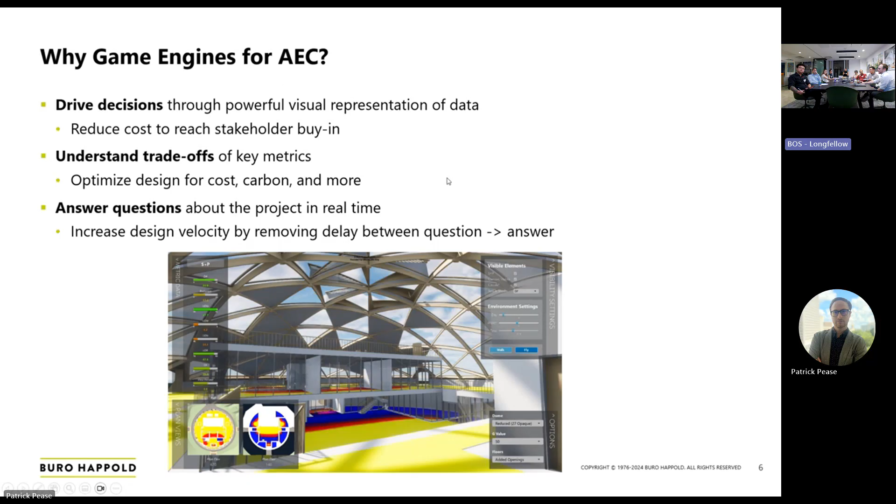The way we think about it is really in three key steps. The first is to ideate, and here it's about collecting the questions that we're trying to answer. We're not trying to go straight into analysis - we're really trying to step back and say, okay, what are we trying to solve? So trying to define: are we talking about the HVAC system? Is that the question? What's the basic HVAC system for this building?

Are we doing a massing study? Is the massing what we're looking at? And then energy costs, is that important? Are we worried about the envelope and its impact for its costs or operational costs? So it's really making sure we understand the questions. And that enables us essentially to define or advise on these are the considerations we want to look at to answer your question for you.

So option A, massing, ABC, envelope XYZ, and intermix those things. But really making sure you start first with sitting with the client and saying, okay, what are the questions? So we can make sure we answer those correctly instead of going straight into some analysis.

The next step, after that ideation, defining the problem, is going through, okay, how are you going to make your decision? We've defined what questions you have. What's the best HVAC system? Now the question is, what is best to you?

Is it first cost that's really important to you? Is it operational cost? Is it embodied carbon? Or is it something else altogether? Something much harder for us to simulate, but equally important to certainly some of our clients.

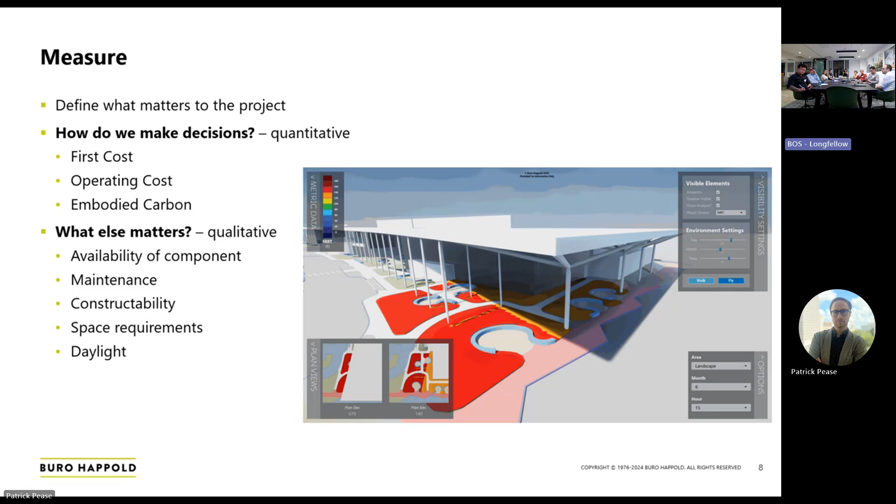And then once you pull those together, this idea of exploring - once you have all of that, what your questions are, how you're measuring success against those questions - then essentially creating this space to explore the opportunities, to see how things line up, and presenting that with the client and walking them through what could happen there.

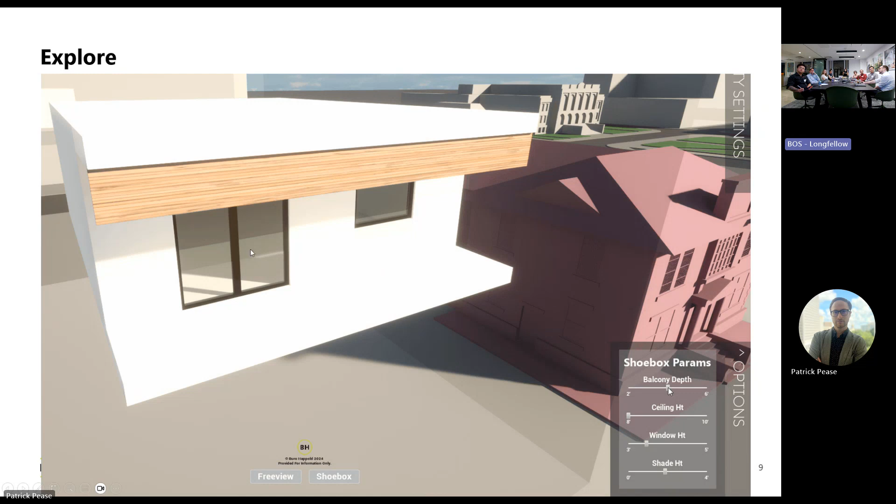So this is, I think, a first example of one of the more shoeboxy kind of game engines that we've produced, where we're looking at the size of the shade and how that looks as far as light penetration into the space beyond.

So getting into a bit more detail with the game engine, I pulled some more of the process slides out so I could talk to them, like how it's all coming together. So the game engine is essentially an interactive 3D app. We are using the technology Unreal Engine.

There are others out there. I know Unity also has some capability for this. So I think there are some people using that as an engine. We just use Unreal Engine.

And really what we're doing is the engine gives us some things for free almost. It has this 3D modeling space. It already has controls in it to move around and have a camera - that's what this engine has. It has things like real-time rendering - again, that's what the engine has.

It's great, but what we're feeding into is essentially these physics-based simulations or things like CFD, and pulling that data in so that we layer it on top of what was already there, which is essentially a more static environment. So we're pulling that data in.

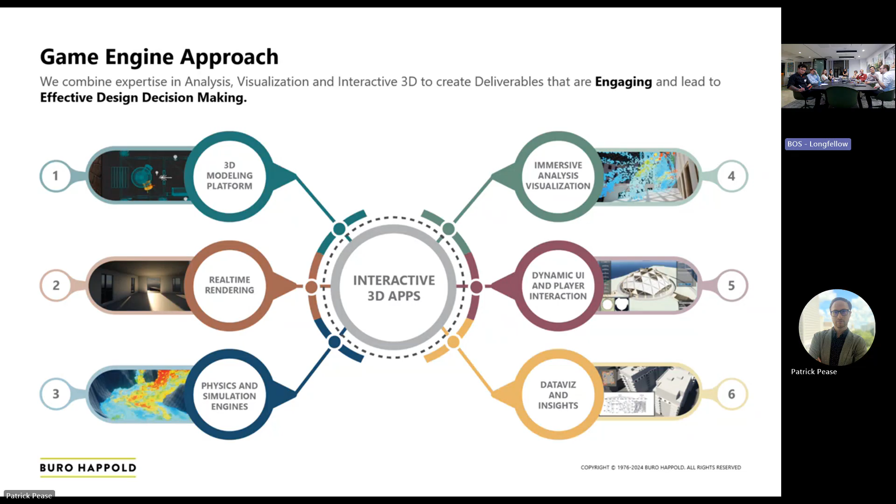And we can also do add-ons such as a UI that gives us control over what we're viewing, or additional things like a table we can pull in, things like that. So there are kind of add-ons that we can have.

The workflow to get out of these is not dissimilar to parametric modeling. In this case, this is a workflow that I worked on with a client about a year ago. And essentially it was kind of sitting down with them. They were working in Rhino, so we're going to do the analysis through Rhino.

So in this case, all the analysis is happening through a series of Ladybug and Honeybee enabled analysis through Radiance and EnergyPlus - not really new things. But what we're layering on top of that is something that allows us to build a mesh, and that mesh is what we're importing into the 3D visualization.

And I have another slide of what that mesh is, but it essentially takes the visualization you would get within the Rhino viewer, making that a mesh component, and then we load it into the Unreal Engine. So that's really just the extra step on top.

But really what we have here is when we were talking with the client, they were going to pass us back and forth several Rhino models. So we wanted to have this idea of what's a feedback loop - we agreed you were going to provide these layers that were going to fit with our scripts.

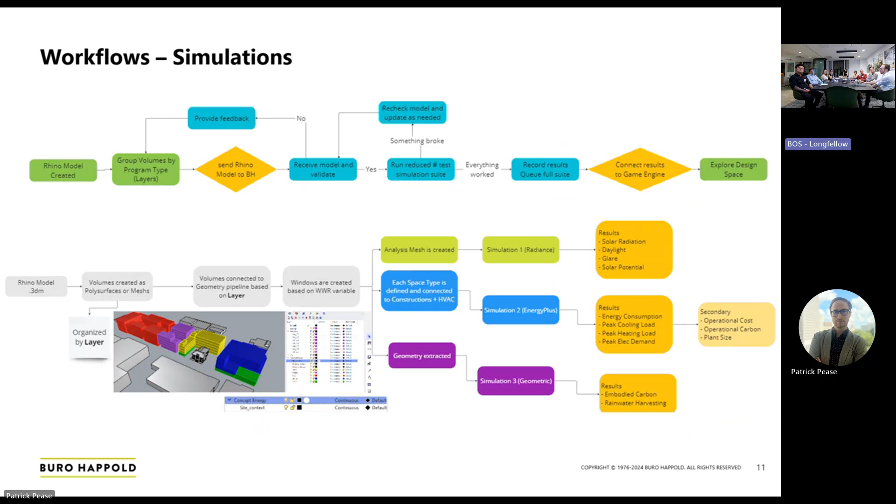First check: did it have the layers? No. Remind them they're supposed to have layers, feedback through - so we can work very iteratively together instead of constantly fixing these models every time. So that was an important aspect of utilizing that at scale and at speed.

How we're doing a lot of the meshes, as I talked about, and bringing them into the engine is using what is called the BHoM. So the BHoM stands for Buildings and Habitats object Model.

It is open source. It is generally created by the computation team here at Buro Happold. I think they released it actually at SimBuild World in Rome, if I remember, is when they released it.

But it has essentially this toolkit to connect data from point A to point B. So there's a lot of these schemas out there. You wouldn't have to use this one. It's the one we're using, but it's essentially a schema to say, okay, I have mesh in one simulation software, Ladybug, IES, OpenStudio. I need to convert it into these components that our tool then transfers into the Unreal actors.

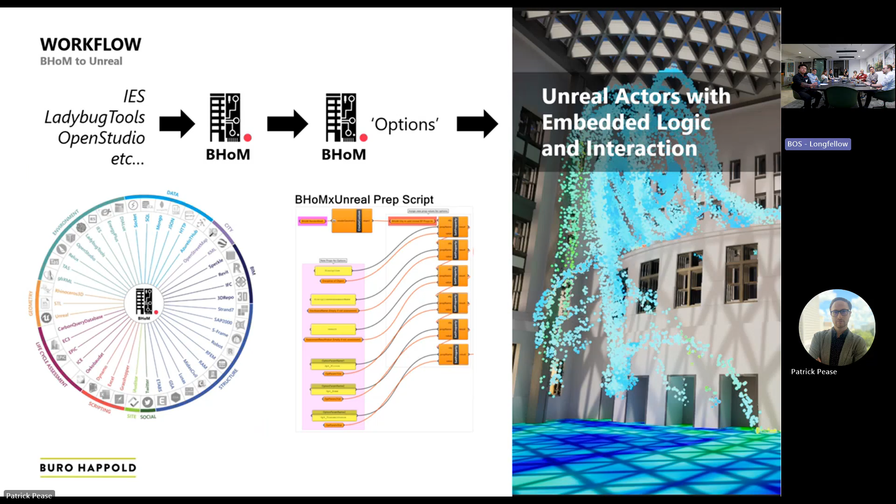And so this, I think, could definitely be done in multiple ways. And you can kind of see the amount of connectors that we've set up that allows us to do it, mostly with EnergyPlus, Radiance, and then ANSYS CFD are the main ones that we're using for day-to-day.

I guess a bit more about the script is, in addition to the visuals, we always try to make sure we add a score in as well, because we want a way to essentially quantify, okay, the visual is beautiful, but when someone asks, okay, is that good? How do we say it's good or not?

So we create that scale that's back in kind of that measure: first cost, what's good, first cost, what's bad, you define those. And so there's always kind of this metric layer as well, so that you could always take that more kind of step back approach and say, okay, it looks beautiful, looks like all the color is red, if that's good daylight in this case, but is that actually the best performing? Or is something else like really hurting here? And so we have various essentially schema to say, okay, define what those are.

And in the various scripts that we've created, kind of pull that information through and then maps to essentially a template that we create within the Unreal Engine database, so we can kind of push it relatively quickly. But this idea of scoring, I think, is important because that provides, it takes that step back and provides that rigor of the analysis that we are doing. It's not just about the visual. It is about, okay, quantitatively, is this performing the way it should be? What's the number that we put to it? So that's an important aspect.

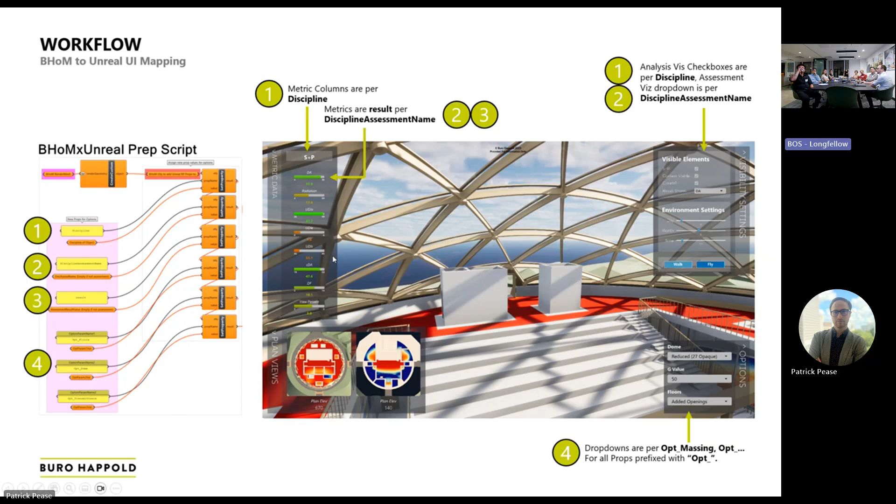I now have a couple case studies that I'll run through, and I'll go through just a couple, and I'll pull up a couple of visuals. But this is one of the first ones that the team did. It's actually for this kind of atrium space. This one's in the UK.

And what they looked at is essentially optimizing the shading within this kind of skylight dome that worked with essentially the daylight, the glare, and also the solar heat gain, but then gave them a lot of kind of space to view. The visual was supposed to be to see as much of the sky as possible.

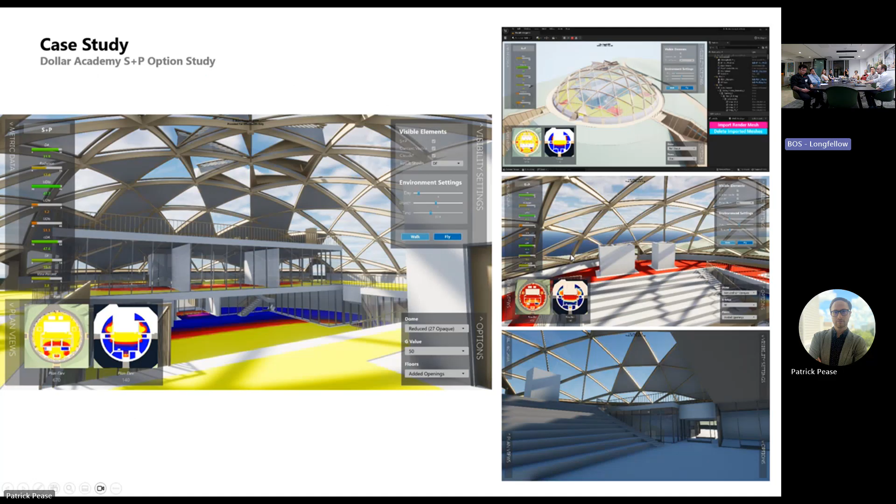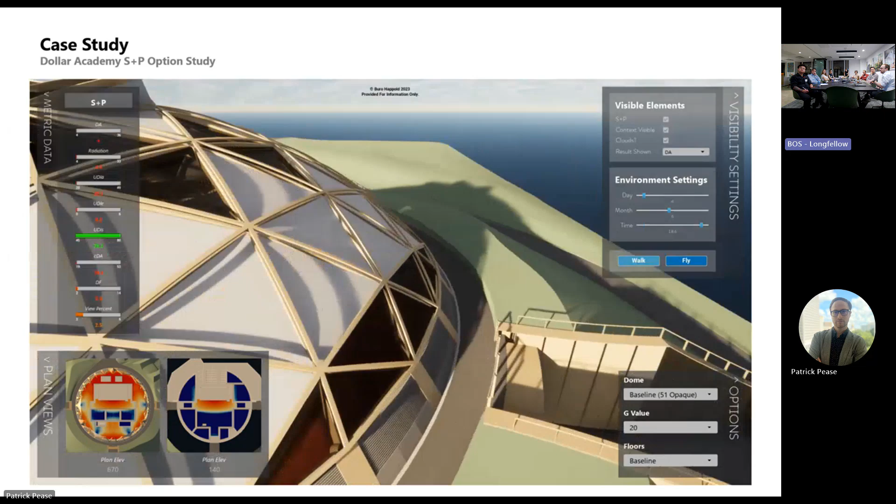So we kind of built this looking at glare with different types of glass, different components of shading elements or not. And I think this is a video. It let them not only see based on a time scale what's it actually look like, but also understand kind of within the space, okay, what does this mean if we're standing in this corner?

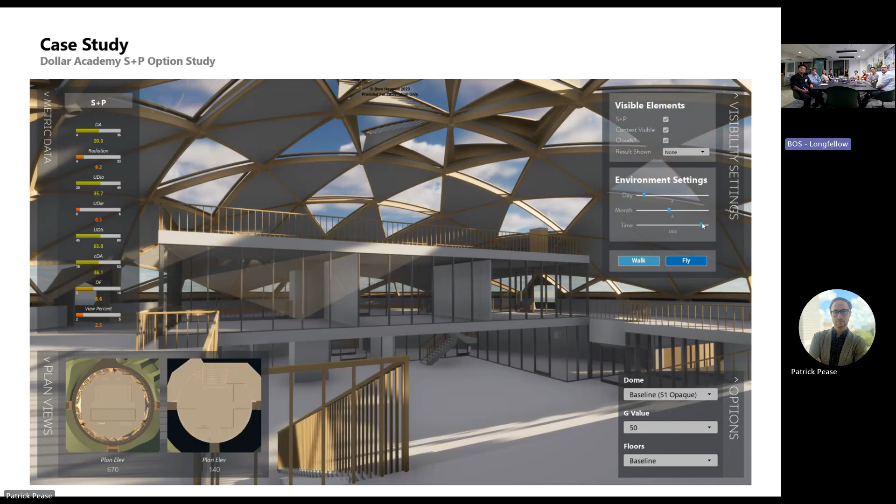You can see on the left here, some of these scores are really low. I think this is probably one of the bad examples, and then there's some better options that were looked at. It allowed them to see not only the impact of these options, so this G value, again, UK, so that'd be solar heat gain coefficient for us, but allowed us to see a lot of this, which is really fantastic.

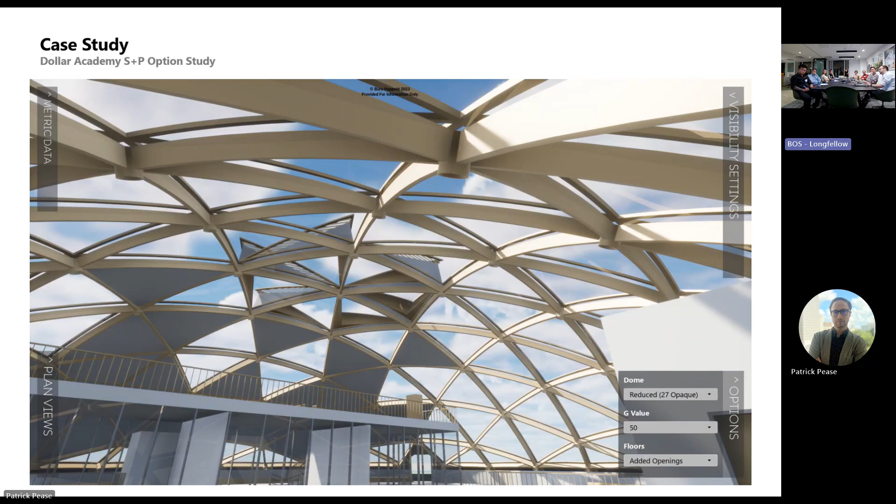The really nice thing too about Unreal Engine, that environmental settings, that's essentially the sun location, that you can change any day, any time of the year, which is fantastic. And so you can layer that on top of the analysis, which is really nice just to see the sun.

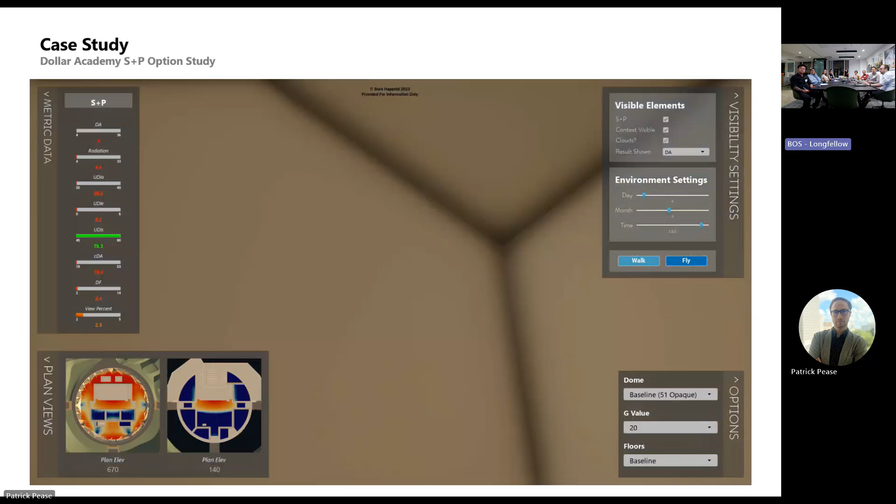So that's one use case, kind of looking at, okay, how do you build these shades to get the pattern of light you want, and then also the performance of glare, etc.

Another one that's really interesting, we saw a screenshot of this before. This one's also UK based, and here we were looking at overheating potential. Most apartment buildings in the UK don't have air conditioning, which 50 odd years ago was absolutely fine since it didn't get that hot. But the world is sadly warming up, and one of the code requirements is to look at passive overheating - will this place overheat? If it does, that's too much sunlight going on.

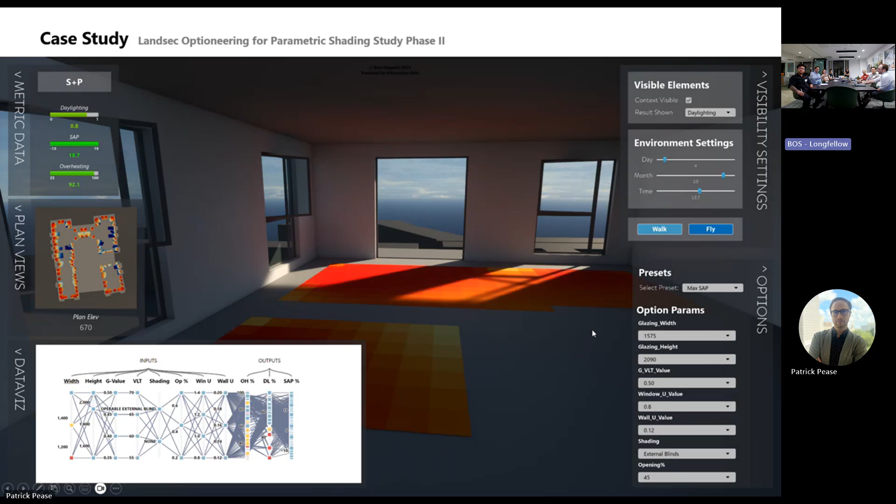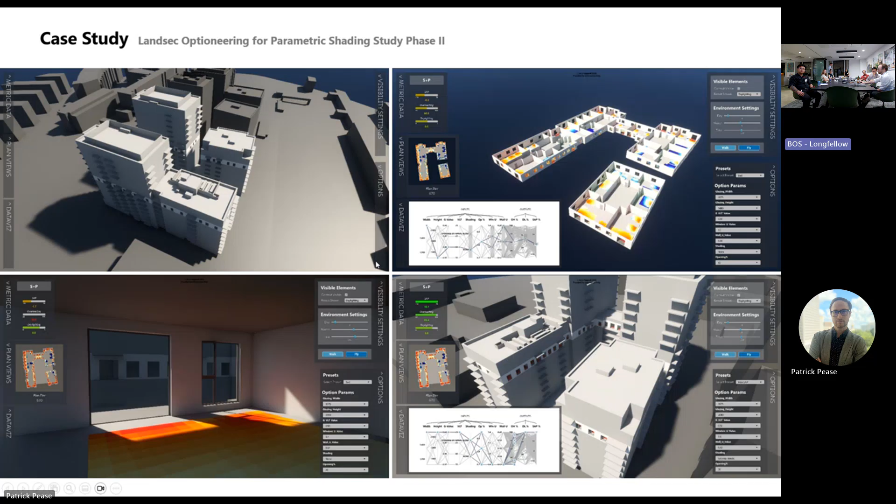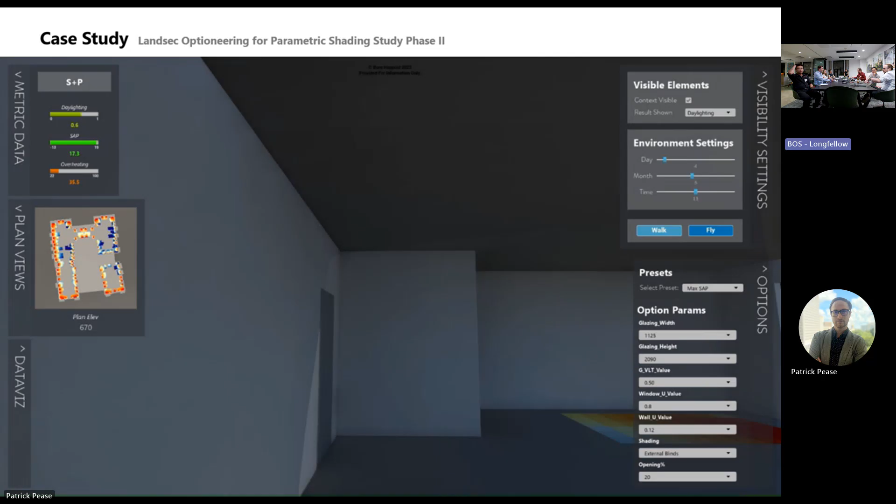In this study, they looked not even at the full floor plate - it's a localized study just where the windows are. Looking through a series of parametric options, they analyzed based on balconies, window size, all of this, to prove out a design. They were looking for a series of multiple designs that would result in buildings that had daylight, but also don't overheat, which is the critical requirement. This was very helpful since they were going to build 100-odd of these apartments, so selecting the window design was very important because if you build 100 of something, you want to make sure you like it. This became very powerful for that.

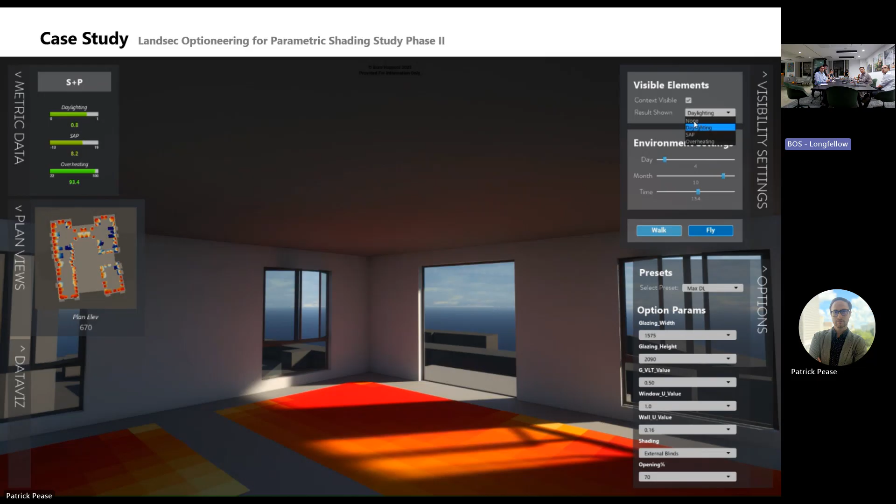That's another interesting example. So this is overheating potential, and you can see somewhere in red, that means there's a lot of overheating happening. Somewhere in green, so they're pretty shaded. That was the analysis for that one.

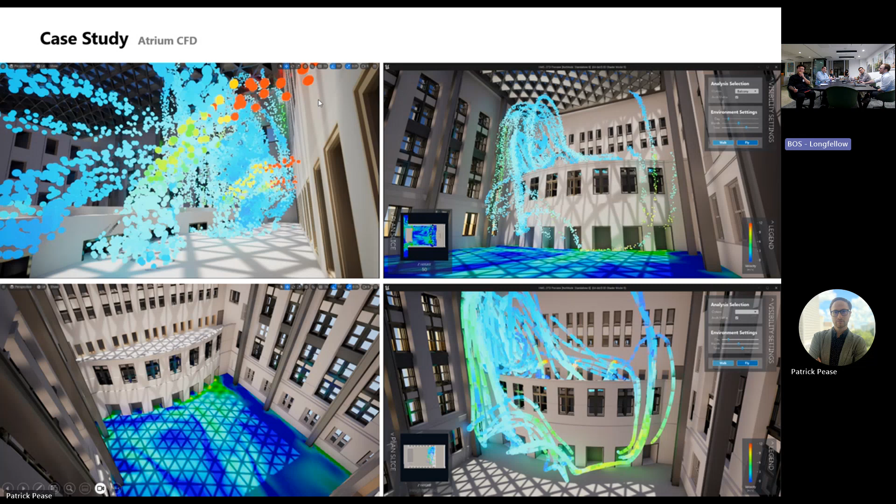This is now a slightly different study - not energy or daylight, but actually a CFD study. This is for an atrium space at a medical school here in Boston. They were enclosing what used to be an outdoor courtyard, putting a big glass roof on it. But then the question is, is it going to overheat? So we did quite a bit of CFD analysis looking at locations of diffusers.

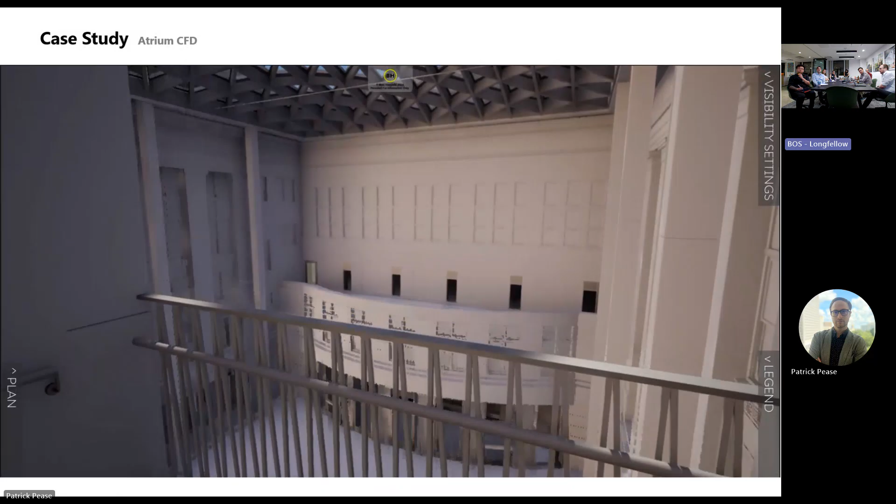What we're trying to visualize is not only the airflow pattern from the CFD, which gives us these really cool dot patterns, but also something we've been adding on from the experimental part - these are streamlines of the actual airflow. Then here on the map, this is the actual temperature and operative temperature for those grid points from the CFD analysis.

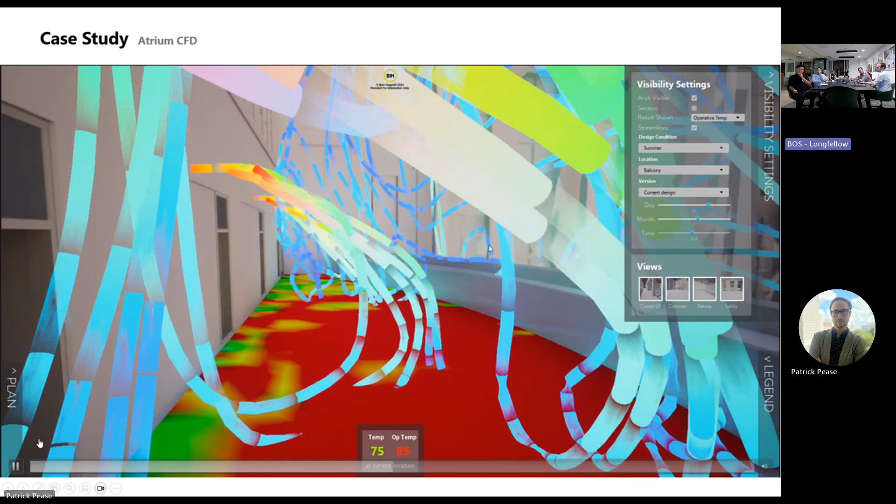ANSYS in this case, yes. What we did is we actually enabled via the walk function - you could walk around and report out what's the actual field for that grid. So really trying to take it out of traditionally just a printed PDF to really give them an experience of, oh, if you do this, this is what it's going to feel like in this location. Walk to this corner, it will feel like this. So it makes it much more visual for the clients, and they can really experience it in some way.

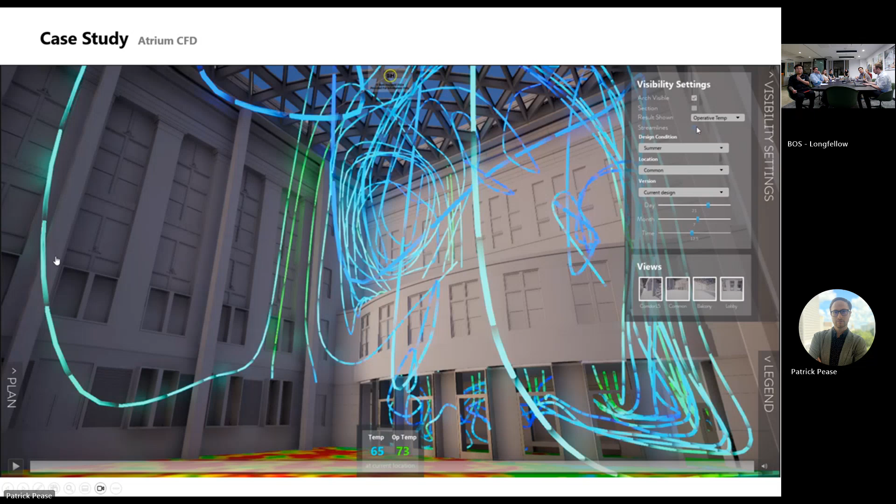Do you guys use this for data centers? We don't do many data centers, actually, so no, I don't think we have. But I think you could, yeah.

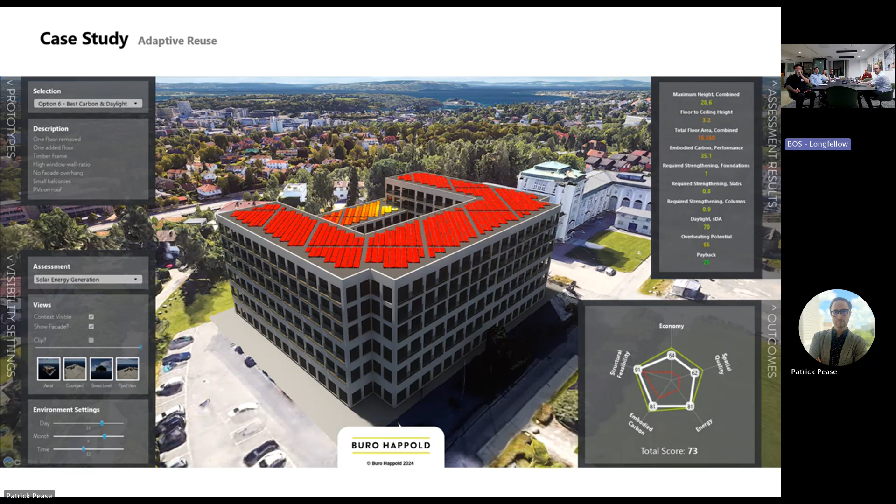And then, the last one I want to show that we've been doing—I've actually been doing a lot of these projects, but unfortunately the projects I've been working on are confidential, so I can't show you.

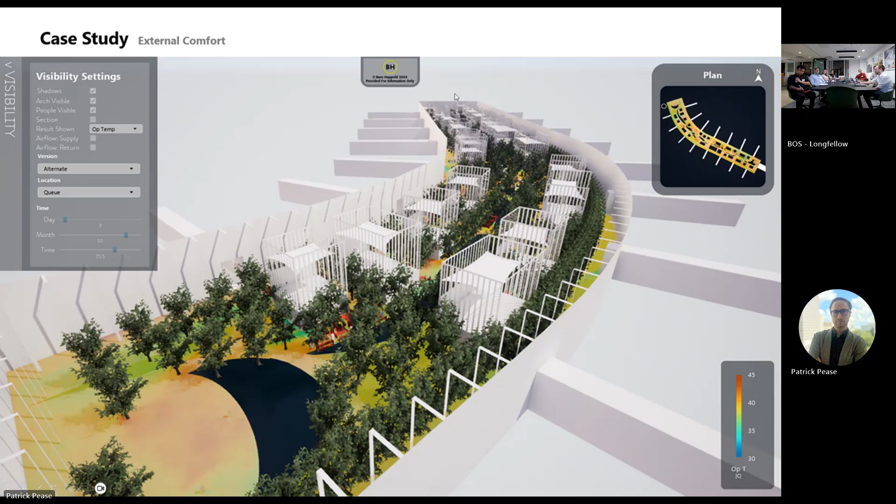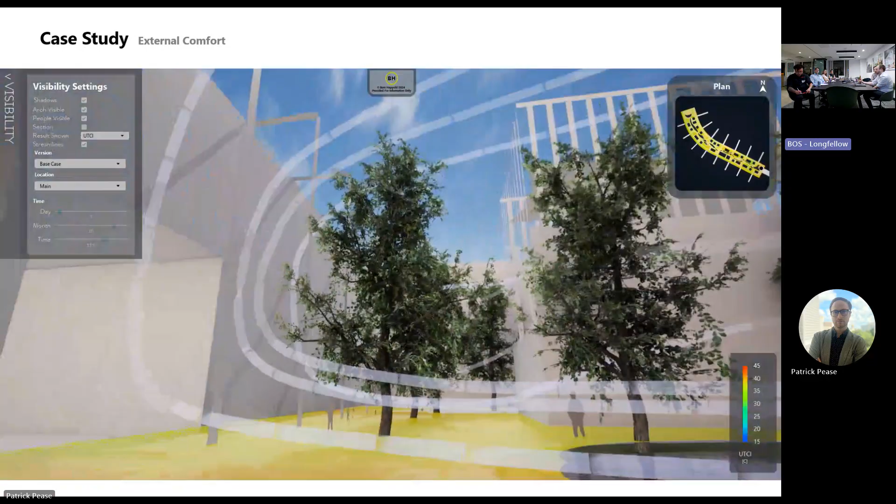But this is one that was done, I think, in Singapore. Essentially, it's an outdoor thermal comfort study. In this case, it's a giant outdoor balcony off some mega tower. What the team did is that outdoor thermal comfort, but then allow someone to drop into the space and experience, okay, where in this giant park is it actually the most comfortable? Where is it not? Are trees helping? Are trees not helping? What's the natural ventilation of it? Where's the air moving? Where's it not moving?

And so this has been really beneficial as well, kind of at the outdoor scale, not just inside a building.

Yeah, we're flying all over.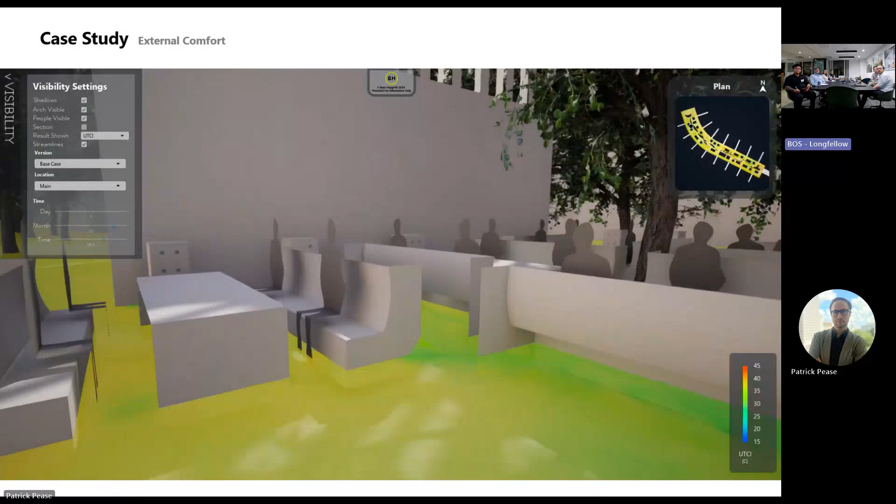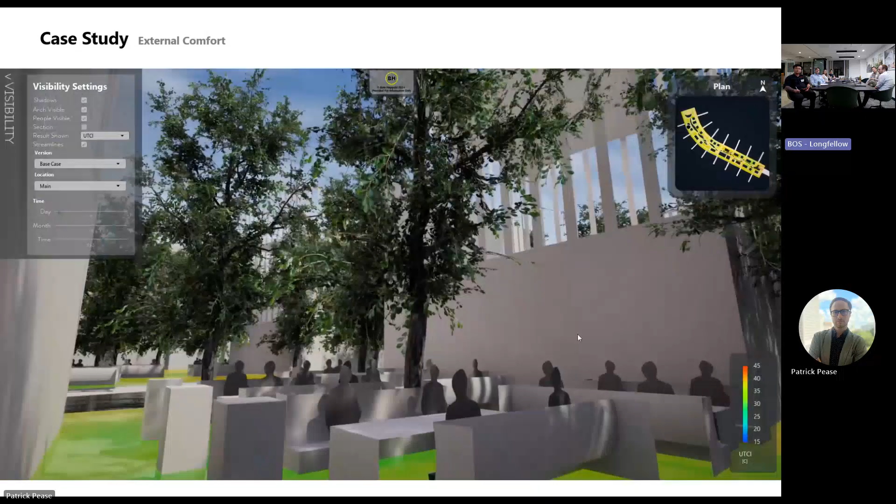This analysis is also really beneficial from a detailed aspect, in places where aesthetics really matter, whether it's a park or something like that, because you can really bring things in and say, okay, this is how it's going to look, this is how it's going to feel, and speak to the client at that level.

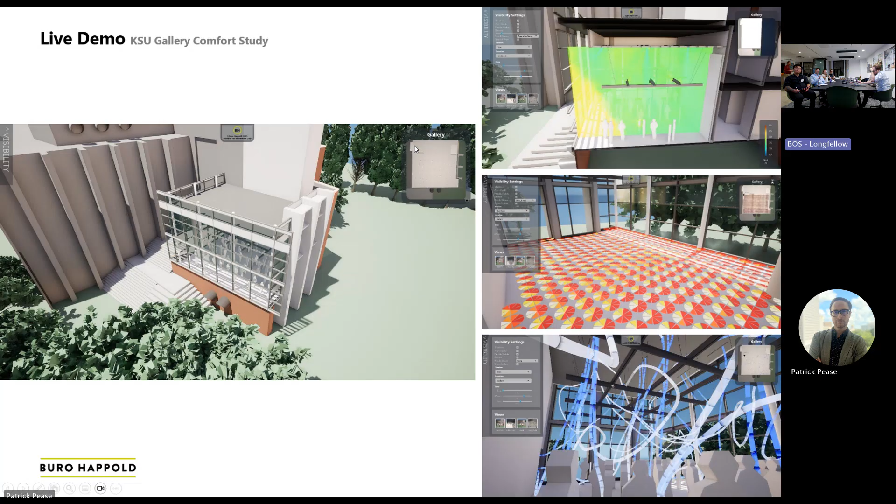I think that's the last one. Okay, that's perfect. So this one, I'm going to pull this one up, and then I have one other I'll pull up as well. I'm happy to just talk through everything.

Let me pull this up. So what we're pulling up, this is the actual Unreal Engine. So they're local executable files with essentially all the data baked in.

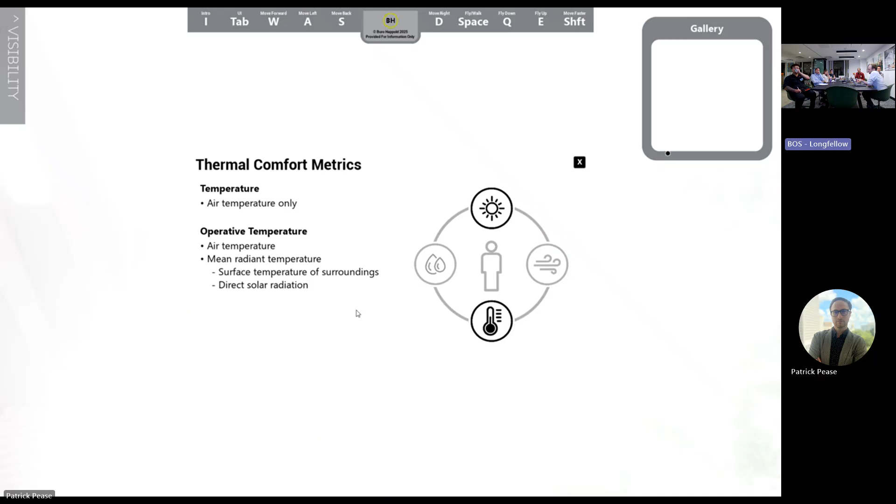I think that's one important thing about the implementation—we're not live simulating these things. Everything's pre-simulated except for the shading. The sun angles, that's live, that's dynamic. But all the simulation, that's essentially why we have that kind of ideate and measure steps. We basically want to design or decide on that design space, go out, pre-simulate it, and then have that really interactive workshop where the client would be like, hey, here's everything, let's go through it.

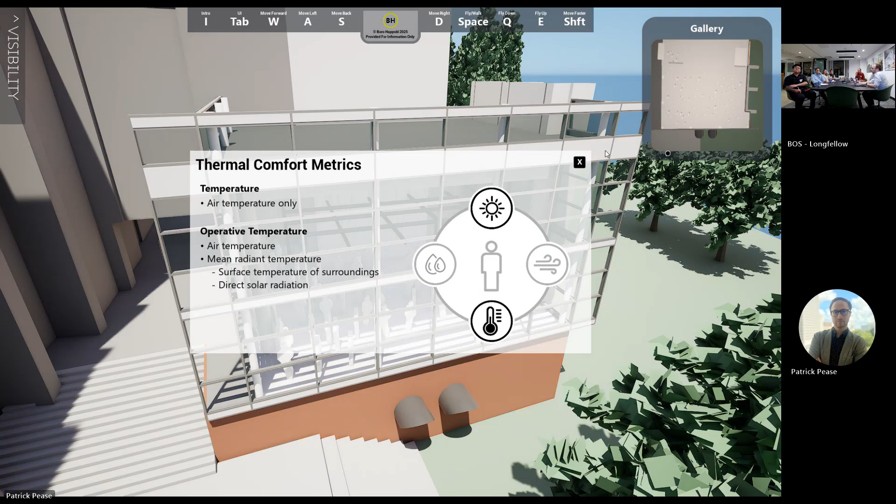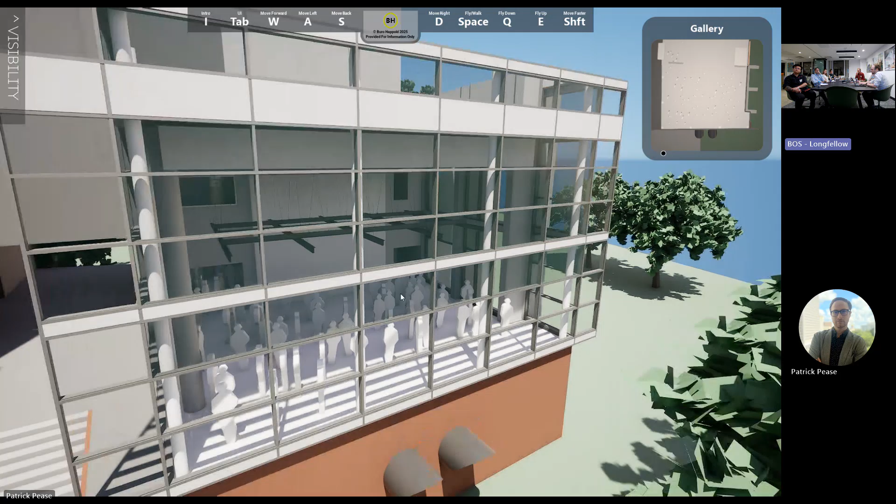And so this one is pretty cool. This is the architectural school at Kennesaw State, just north of Atlanta. This was a gallery space they had created. If I recall, unfortunately it's facing south or west, I can't remember which, so it overheats drastically. We were brought in to do a lot of on-site work—say, okay, what's happening? Look at the glass, our facade team was involved, all of that.

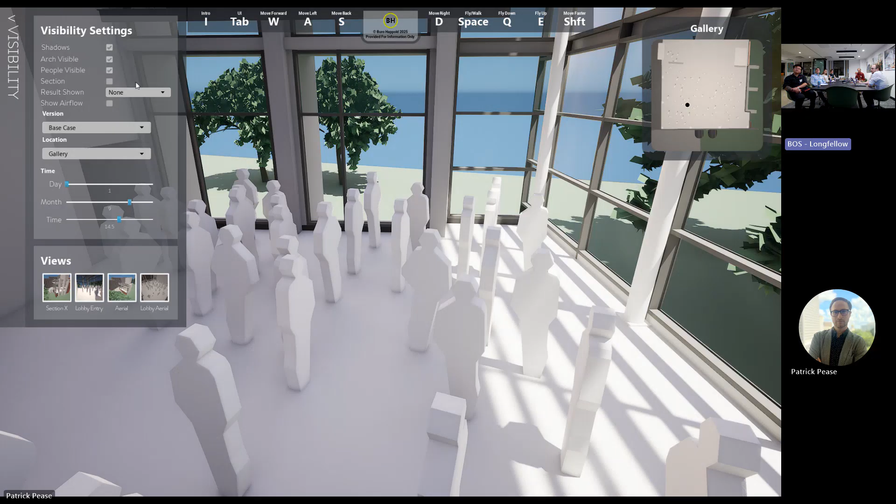And then on top of that, it's like, okay, well, let's visualize this so we can really see what the options are. So I'll just fly into the space. And then under visibility settings, what I can do here—what we looked at is glare. This one we did a slightly different look at. So here we have glare.

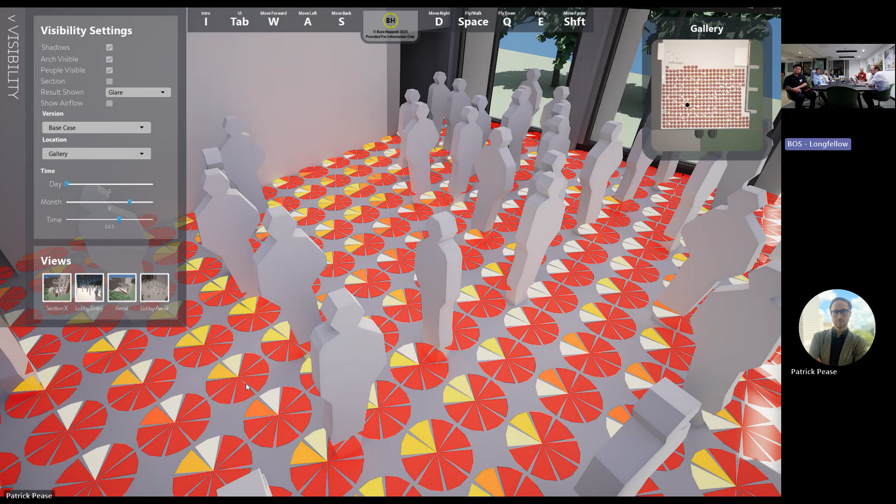I should have looked up what this was. I think it's glare at different times of the day, which is what we did on this chart, this kind of pie chart here. Essentially showing, for most of the day, lots of glare, really bad. Some parts of the day, in the evening, okay.

What we were looking at for this particular design was, say, okay, what if we did blinds? You can see a good part of it, a lot of the red's gone to yellow, but for a lot of it, it hasn't quite fixed it. So there were other things that we looked at to mitigate further.

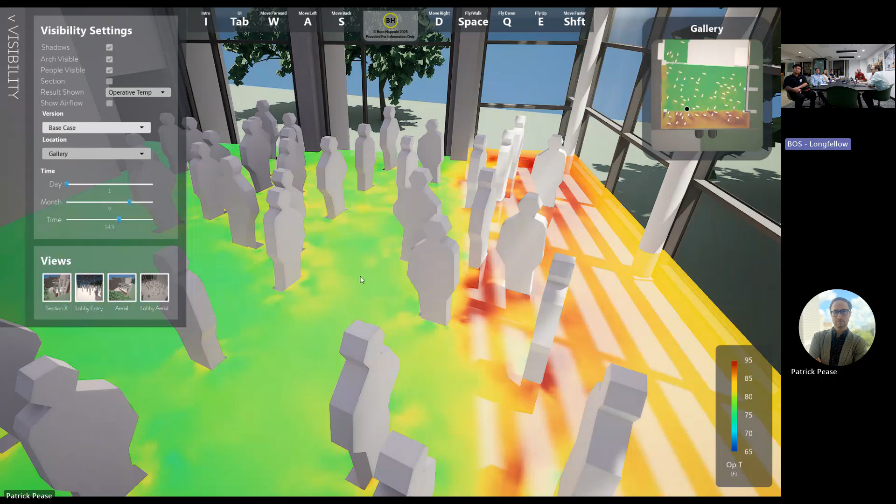The other thing that was really challenging with this is the operative temperature as well. You can see it's very hot by the window—the scale goes up to 95. There's pockets there that are 95 inside.

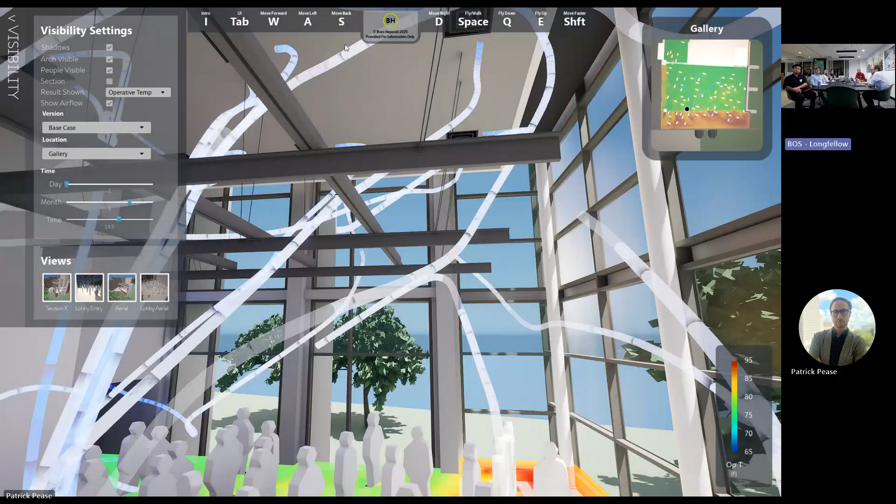And so the team was looking at different versions of flow from different diffusers. I think the standard that they had was just some square diffusers intermixed near the roof. They looked at different ones—they did a kind of half volume approach, which was slightly different, and then a slot approach to really blow the air at the windows, just to see how that improved things.

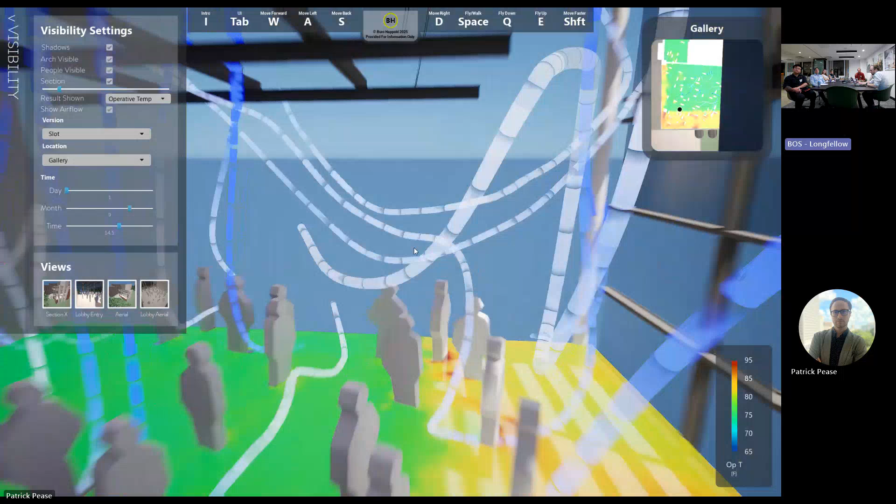And then the other thing that's nice too, something the team just built into them recently, is this idea of a section. You can cut the space and look at different angles. There you can actually see the slot diffusers where the air is flowing through. We're going through options with the client effectively, saying here's option A, here's option B, giving them a sense of understanding of this visual, so we understand how the air is flowing and how that's either beneficial or not.

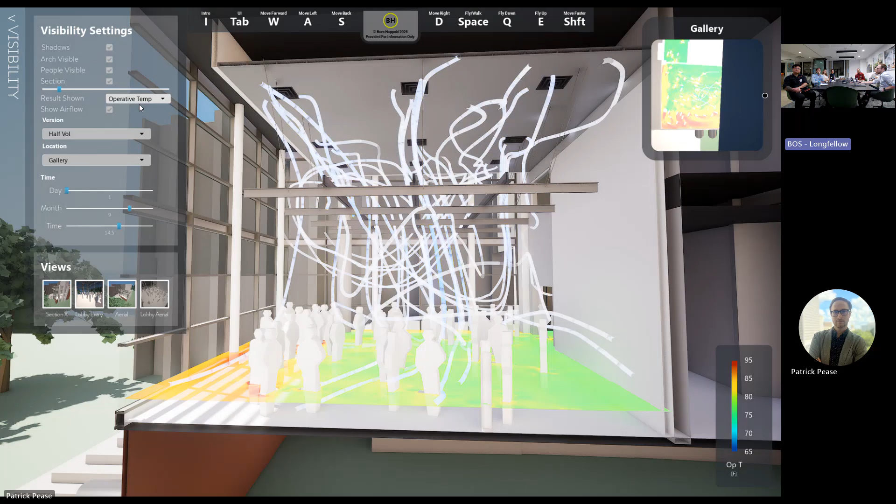It's like a 30 feet tall space and then putting a diffuser on top. I can't remember what the actual solution was. I think in addition to the blinds—oh yeah, we rendered the blinds, I forgot about that, there they are. I think they ended up going with blinds plus slot diffusers, which got them pretty close to the case they needed. But as built, it was hot.

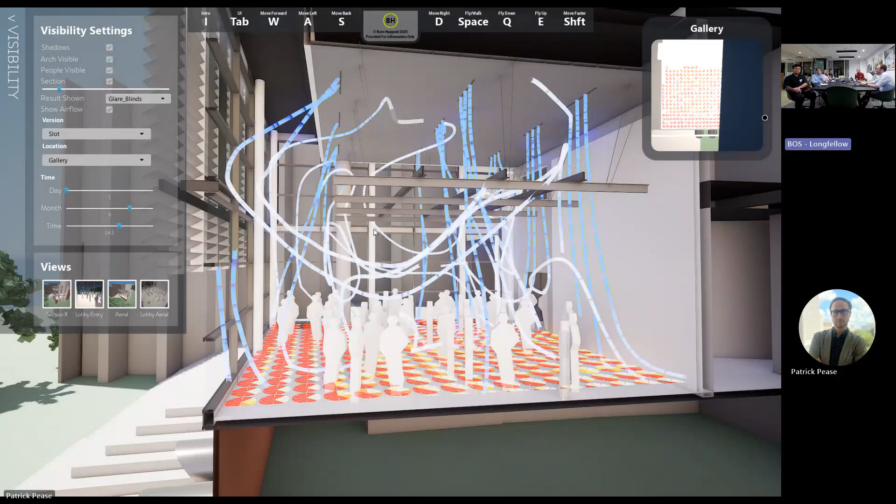People were sweating. So is your CFD simulation also responding to the way the blinds change the heating on the floor? Yes. For the CFD simulations, our workflow typically has been to run an IES model first, and from that we get radiant temperatures for surfaces, which we plug into the ANSYS model.

How do you choose what time of day or what day of the year to use for that? That's been an interesting challenge. You run the IES model first and then export the condition to CFD and run it for the radiant component. But for time of day—because CFDs run over a minute or so—for this one, I wish I'd asked the team. I'm assuming they picked a design day, likely in July, because it's very, very hot.

For some of the outdoor thermal comfort items, though, we've been erring more toward a 95th percentile day, because what we want to show is that interventions still have a benefit. On a 95th percentile day, adding things like shading or fans, you can typically go from very strong heat stress to moderate, and you're like, yes, I did something. On the worst case day from a design day or weather file, you're going to go from extreme heat to very strong—so you still did something, it just doesn't look as good.

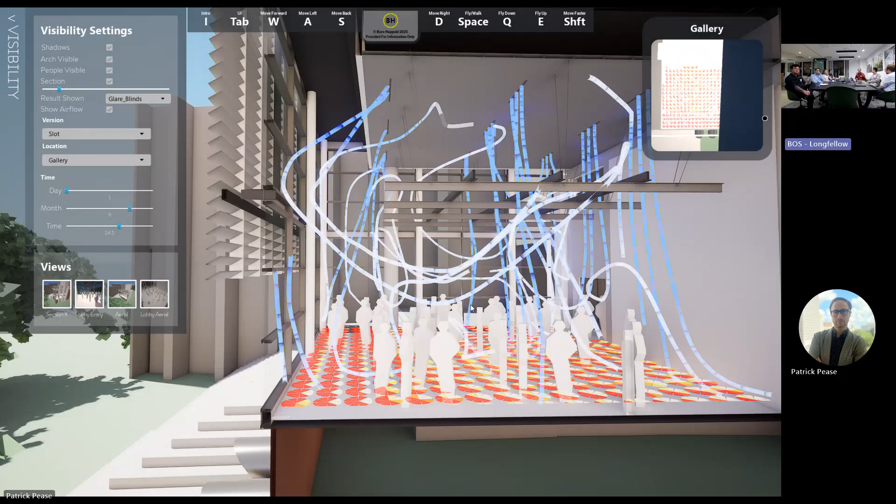But it's a good point that if you had the actual time space, in some ways it becomes a video. Would it even be reasonable to store that time space? Because you'd have to store it in 3D. I know RWDI makes plenty of 2D animations showing how turbulent flow changes over time, but here it wouldn't be 2D, it'd be 3D that you'd be storing. I wish my game engine expert could join us, maybe we'll get him here next time. But I do know the Unreal Engine data schema is helping us quite a bit on file size, so it's relatively efficient file-size wise.

So there's potential there, thanks to what Unreal has already built in for us. There's probably something we could do. What's your tool and what's your workflow in a scenario like this? We don't have a way of representing that time space either, aside from doing animations. But animation is based on a simulation linked to the animation—where did that simulation happen? We've been moving a lot to OpenFOAM. But before that, we were doing a lot of ANSYS. Yeah, getting too expensive.

It's more expensive than Unreal, that's for sure.

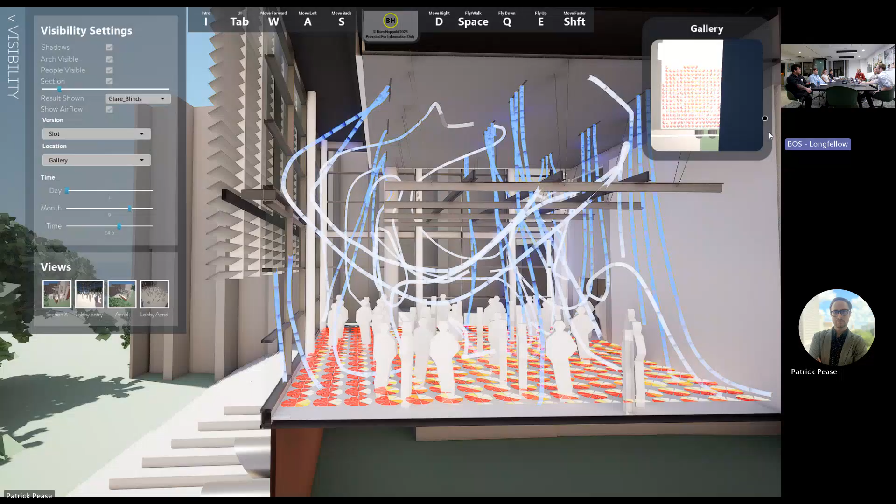At my previous job, we used Cadence too, so they can link the external condition and the internal condition, run a static model, and then run a transient model. The file is like 100 gigabytes per run.

You probably need to use a cloud run. One simulation costs you $2,000. It does add up. So that would be, it can do what you described, just at what cost?

Well, there's the cost of running the simulation, but then there's the size of the data you're trying to bring in. You're bringing the data in through Grasshopper, it looked like, or is there a separate process now to get this data in? I need to double check.

I believe we have a component for ANSYS that we didn't use before. That seems more reasonable. So we reached a point with Grasshopper where the amount of data we were trying to bring in slowed things down too much. We couldn't do it anymore.

Have you guys used Star CCM? I don't think so, what was that? Star CCM, it's a Siemens CFD. We used to use it, but that was before my time in Europe.

It handles transient simulations really natively. We've done mostly ANSYS, a bit of OpenFOAM these days. People keep dabbling with it.

Are you guys sponsored? OpenFOAM? I mean, that'd be great. I don't know if OpenFOAM's got any money, but if we could get ANSYS, that'd be cool.

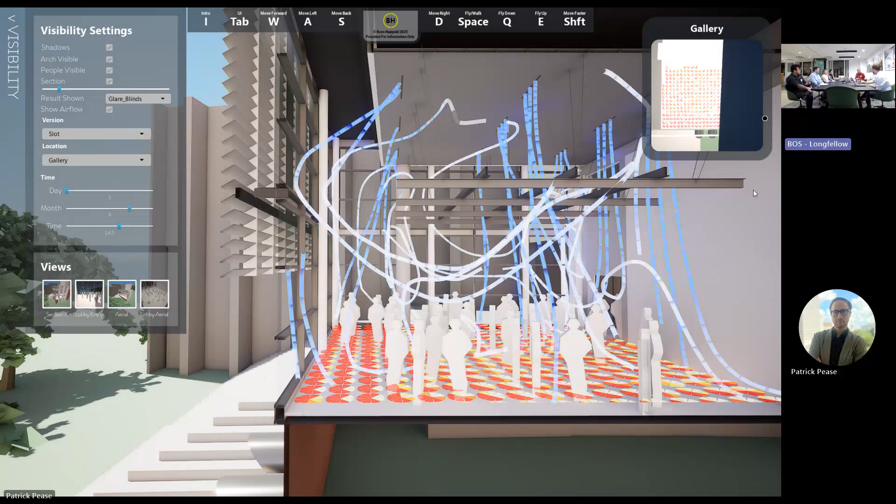I want to pull up another example, and then let's just open up for discussion on this, and then also we'll feature the chapter and stuff.

This is the first one I actually got to work on when I joined about 1.5 years ago. This is for a mixed use development in Arkansas. This is the one we worked closely with an architect on the workflow, they were playing around with massing quite a bit. We would get the render file, process it, plug it into this, have it at the workshop, and kind of went back and forth. It was a really dynamic interaction, which was great. And I haven't opened it in 60 days.

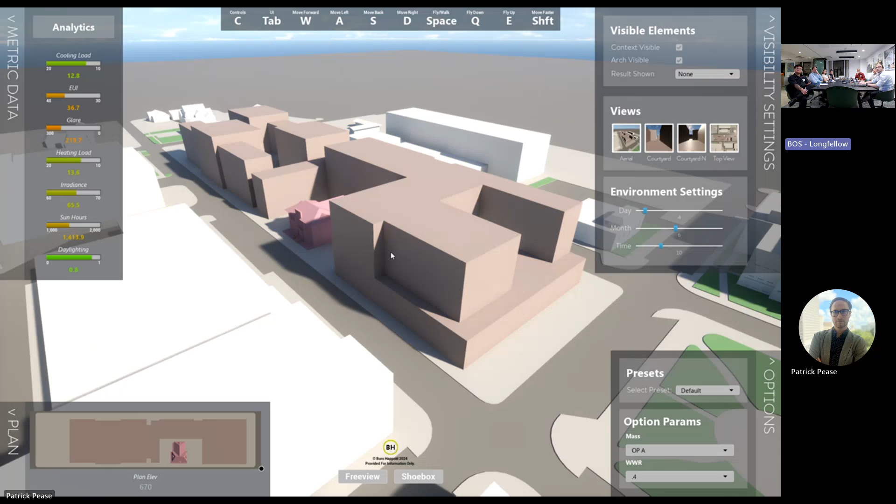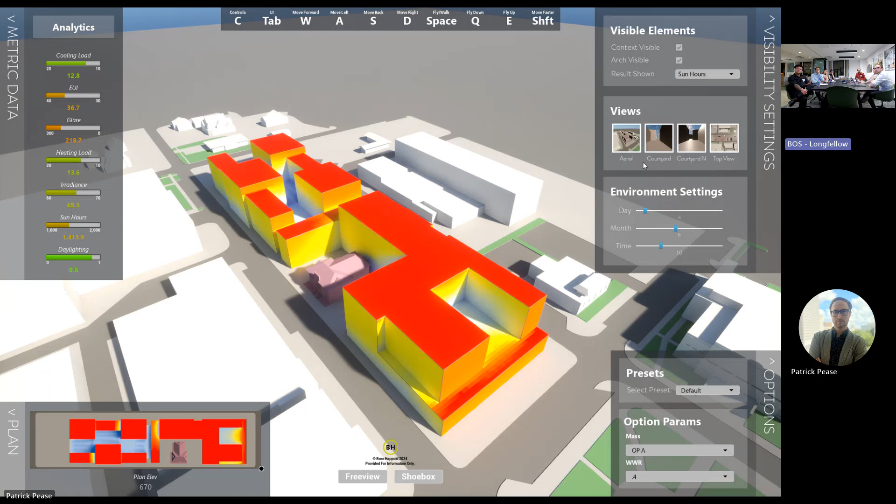There it goes, look at that. What was interesting with this one is we were really trying to play with how to visualize different parts of data. Things like sun hours, super visual, looks great. We can visualize irradiance as well, and daylighting. In this one too, I got the architect turned on to it. We were actually also trying to visualize things like energy and peak cooling load.

These we struggled with. Essentially what we did is scale it for the cooling load. In this case there were 5 different use types, so the different buildings have different colors based on what they are against each other. Didn't quite work. What's the metric for cooling load?

This is kBTU per square foot, I think is what we have here, or like EUI. This didn't quite work, it didn't quite hit as well as some of the other visuals. So we haven't gone further in that direction, visualizing the annual energy result - it's a single number, doesn't quite look as interesting.

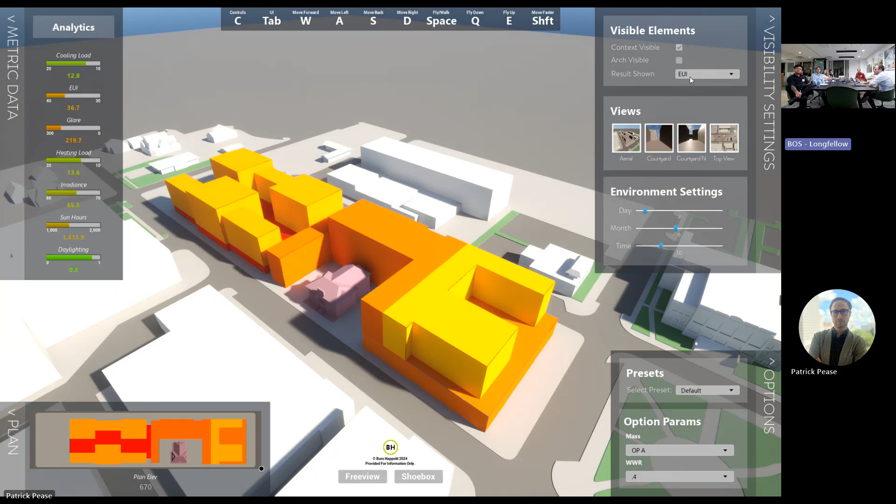But what we were able to see, especially on things like the glare and the sun hours, we were able to optimize a lot through different massing. We went through 5 different iterations of massing, A, B, C - B and C are really similar.

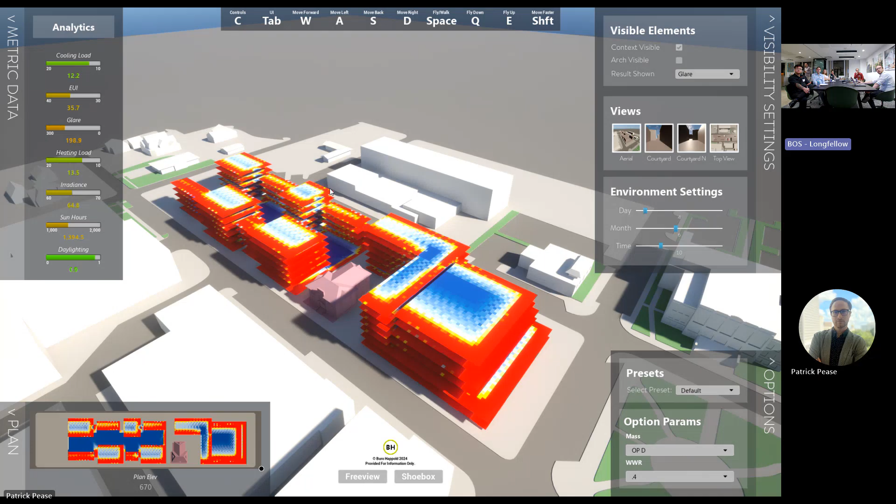They're kind of playing around with things back here. And then we went kind of crazy, changed it around. This one changed quite a bit, it's now an L, things like that. And then even down to E, which we kind of moved things around altogether.

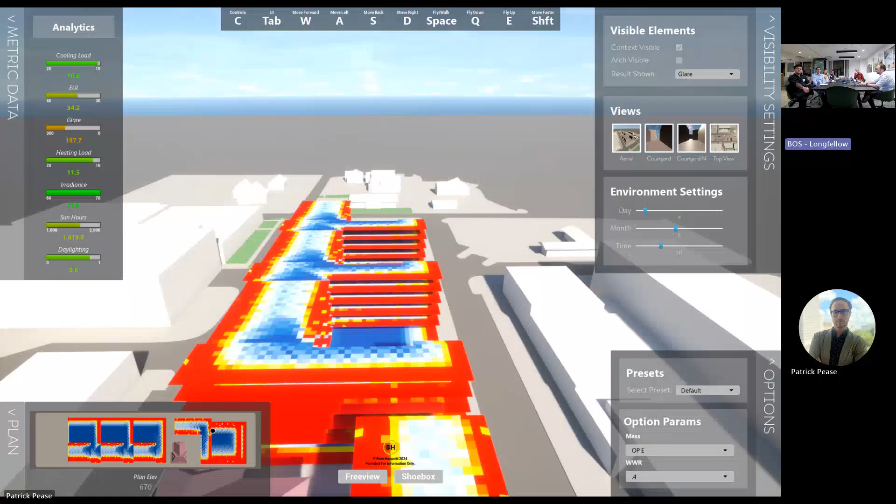Through the workflow, they were able to feed us these different massings, and we plugged it straight into the game engine. We met with them weekly to go through all these things, which was really fantastic. It was really enjoyable to have these conversations quickly, because we talked about the workflow and how we were going to look at that during the meetings, which was really cool.

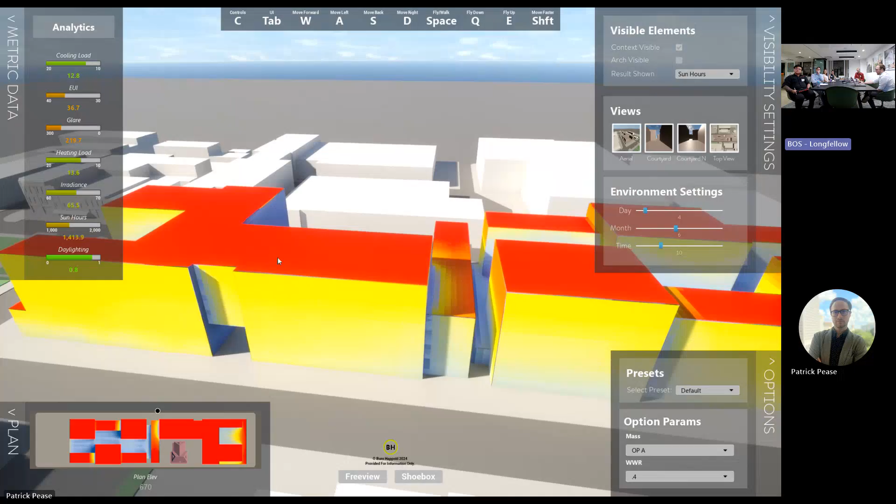And then the other thing this project in particular spent a lot of time looking at was actually the sun hours. Let me go back to A, because I don't remember what the comment was. So A, this was going to be an office area, this was going to be a hotel, and this was essentially apartments. You would call them luxury apartments. I've lived in them like this, they're just apartments.

But where we really looked at them a lot was this idea of these courtyards they created, and how livable and nice were these. And what we discovered with them is right here with the sun hours.

Where's my scale? I can't remember my scale, sorry about that. But essentially, blue is very few, something like 500, and red's the full, like 2,000-ish that you would actually get.

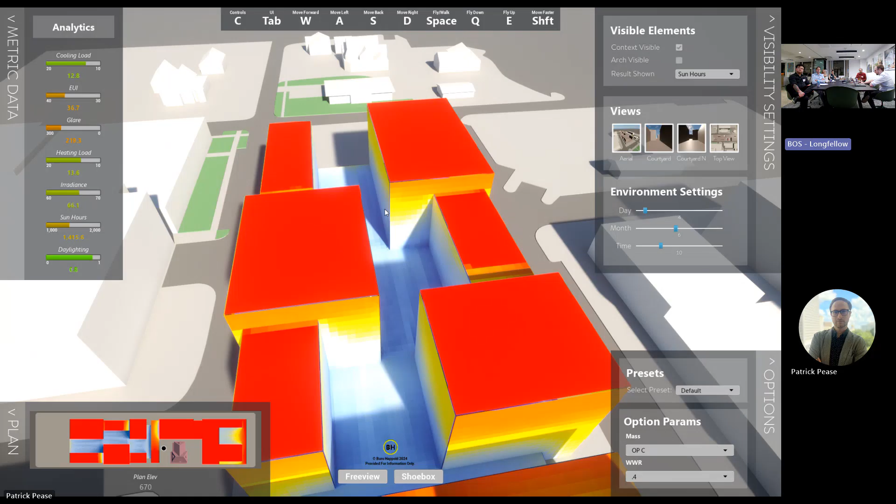So we basically had these conversations of how do we get more light into these spaces so that people would want to have a barbecue in the afternoon, want to be in these kinds of spaces. That's when they pivoted from just moving these blocks around, which really did nothing to what was happening here, into saying, okay, what if we, in this case, tried to break things up height-wise so they get some more light in.

We saw that didn't really make too much of a difference. So they pivoted all the way here, which opened up these, same area with the built area, all of that. But now we have these very well sunlit courtyards that were just much better amenity spaces. So it was really interesting that this is what we focused on, even though we were still running EUI, peak cooling loads, all of that every single time.

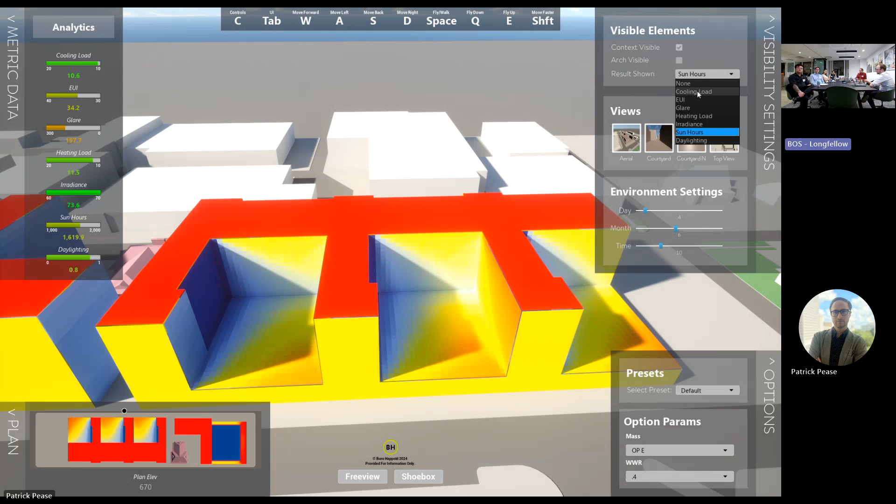Well, those changed really slightly. What we found was the really interesting metric here was this idea of sun hours, and it was a really cool way to visualize it with the architects. So I think it's a really cool outcome and a really cool use case for the whole simulation and then the visualization of it as well.

Yeah, I think I'll pause there, sharing out game engine things, and happy to chat more about it. Any questions to start? Super cool stuff, I'll start I guess.

To what degree do you need to really understand how Unreal Engine works to be able to use something like this? Do you have somebody here who had that experience when he was hired and was able to leverage that, or is it something he kind of learned on the job?

So the person who kind of built this out for us is actually on the West Coast in San Diego, and he's kind of a computational designer. I think he has some experience with some of these tools before. I need to get the full story from him, but he lives next door to the AEC salesperson for Epic Games that sells Unreal Engine. I feel like they clearly got talking one day, and it's like, oh, it's not that hard, we'll build this out.

But what they were able to build out is Unreal Engine lets you template things really easily. So we basically set up this template. Everything you see here, like these settings, that's a template, we don't build that every time. There's options as a template, even this is an option, or a template. And once that was built out, which I'm not sure how much effort that was, it's really plug and play in a way, it's like have the data, push it in. So from that respect, it's been very repeatable, which is very cool.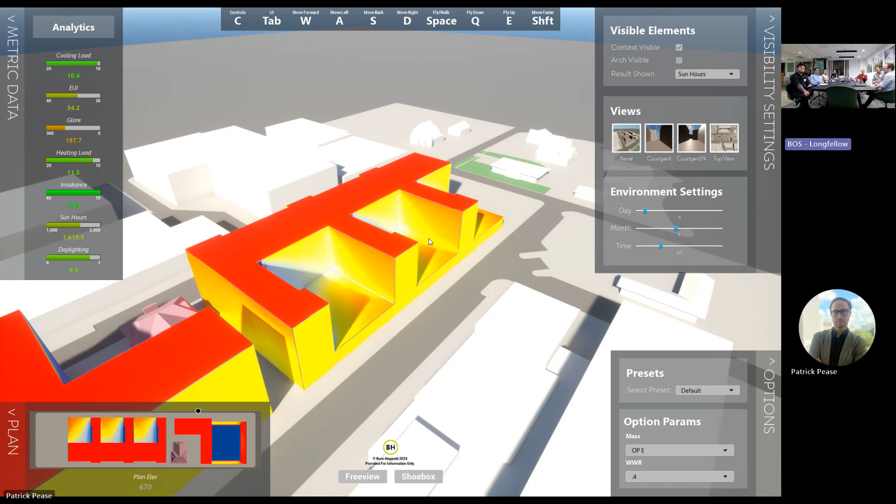Yeah, I could definitely see this being used by others. In the architectural space, they have their own rendering software that they're using. Maybe one of the challenges they might find with Unreal, with what we can do for very detailed visualization, is that you can see our context is really pretty plain. I don't actually know, getting textures on that might be a huge lift, and we're skipping that because it's not super important to us, but that would be important to an architecture course. That might be a limiting factor for how we see that aspect of it, but I'm not as familiar. The quality of the render, though, I think is excellent.

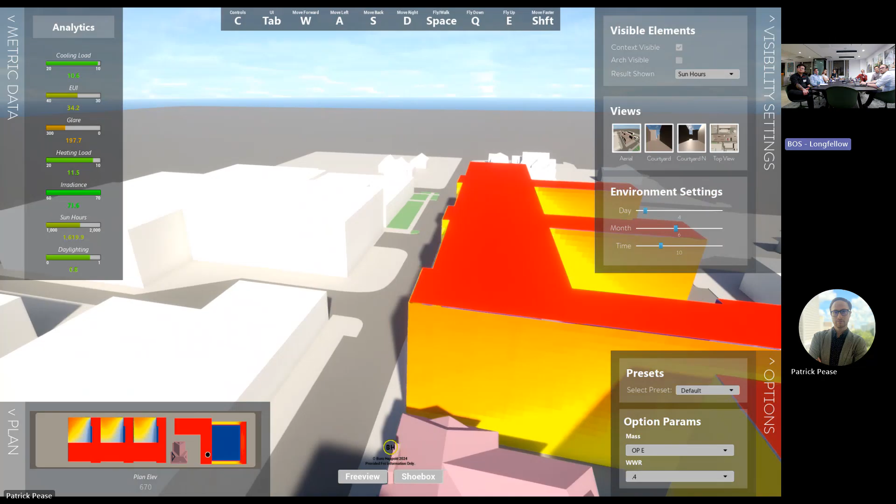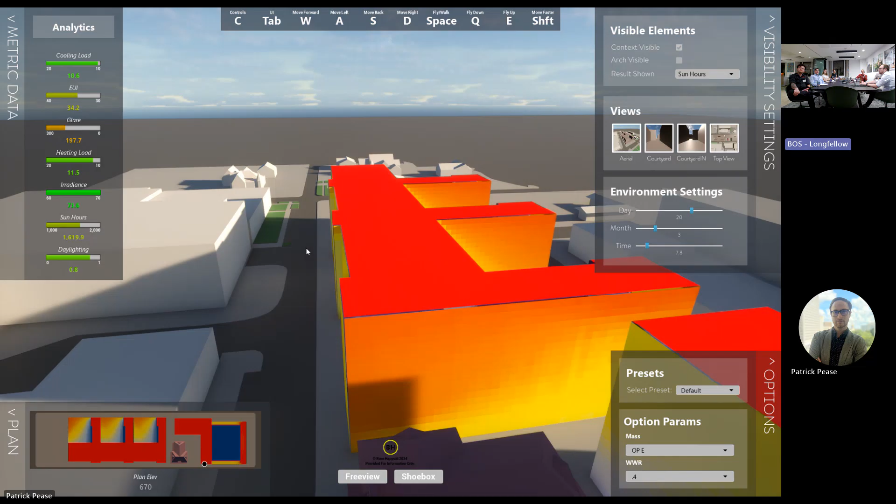Also, as I mentioned, you can change your day and month dynamically, which is really nice. I haven't done a simulation to back up and say okay, is that exactly where it should be, but for a tool like this, it's good enough. It's getting the point across, it's not the detail of the analysis. So it definitely has some good benefits there.

So if I understood correctly, you said that the options are predefined. They give you all the options, you run the simulation beforehand, and then do the visualization.

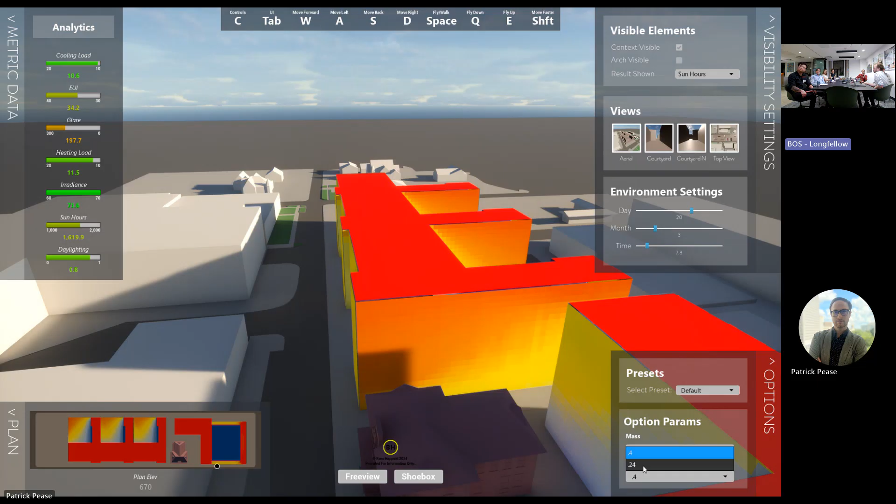I wouldn't say that necessarily. Often we will co-define the options with a client because they might not understand all the things they're looking at. So in this case, the architect went through and said okay, I have these four massing options, but we added on top, for example, let's look at some different window-to-wall ratios for you, because we think that's also going to be important. So we would potentially add additional options, but it's not possible to change anything on the spot. It's pre-run.

So how feasible do you see that? Is it something coming up that could be helpful, or is it maybe computationally very expensive? It could be.

All the simulations you see are run by a Grasshopper script I put together that triggers 5 different EnergyPlus simulations and Radiance on a computer in the closet, and it runs all of them, then I import them. Could you speed up that workflow to pull this in within an hour? Yes. But to my knowledge, Unreal doesn't have any analysis built in, and it's unlikely they'll go that way since their bread and butter is still video games.

I met someone from Unreal at the Thornton Tomasetti event last week and chatted with them about this. It's cool, but extra for them. The team working on it is like two people, one West Coast and one East Coast, so unfortunately Unreal is unlikely to build this automatically for us.

Have you looked into platforms that would allow you to present this as a web app instead of an executable? That's a big thing Eric, who I mentioned, has been looking at, because it's been a hiccup we have to figure out: how do we get this into the hands of a client, send a file, and then their IT has to unblock it. So there are some annoyances there, but that's something we're looking at.

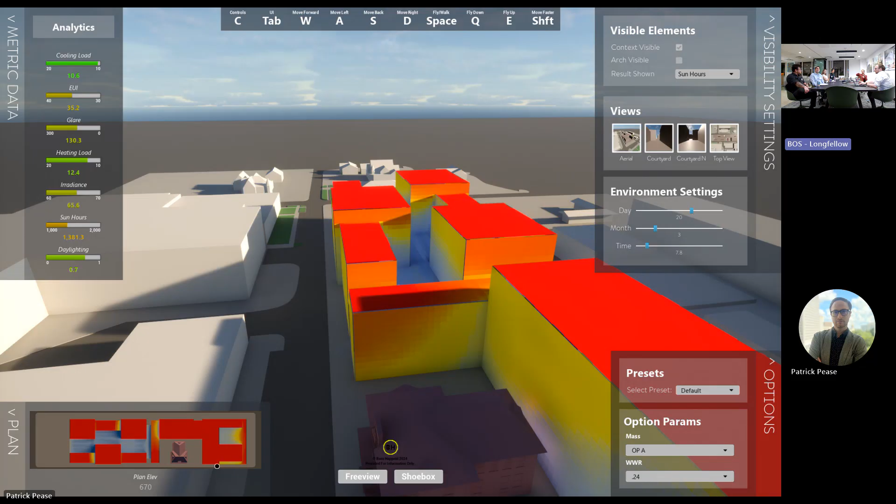You showed some screenshots that looked like a first-person walk-around view, and now what you're showing is more like an aerial flyby. Do you feel like one of those two methods is easier or harder for the client to understand, or to get the message of the simulation across?

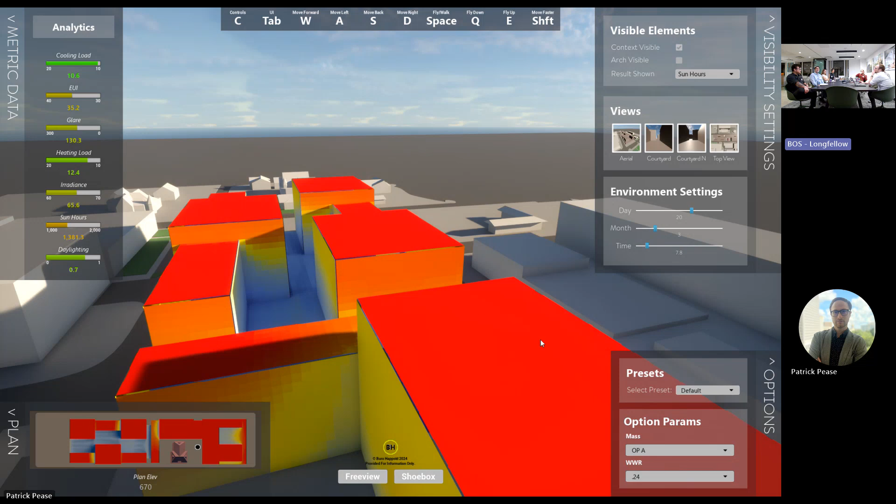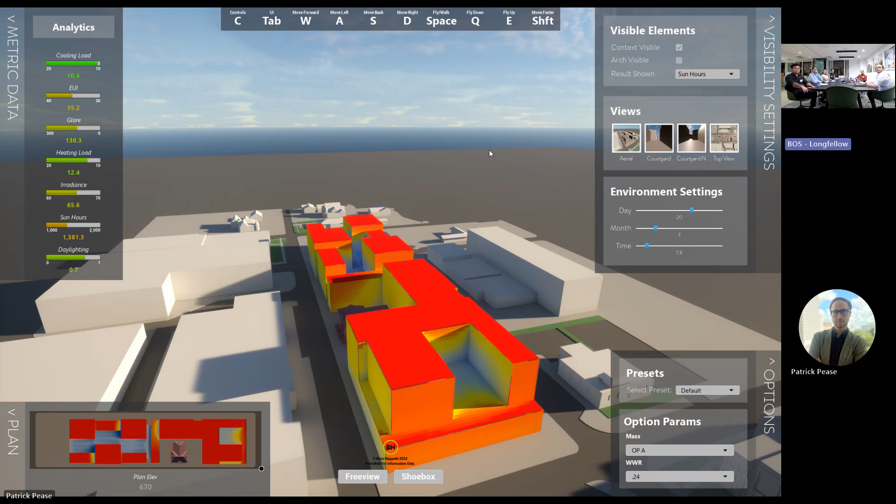I think it depends on the scale of the project. In this project we're looking at site development, about 400,000 square feet, 5 different program types, so it's always the client, the architect, and the end client thinking at scale, like how does it all look together. In this one, you can drop into the space, fall to the ground, and walk on the ground, hopefully the ground's there. You could view it that way too.

But what we were thinking about as a project team was always the whole thing at a time, whereas in the other project where we were looking at just the gallery space, it was more about being in the gallery space and what it feels like. So we used walk mode quite a bit more in that case.

I've found with my students that some of them will do the simulation and then do a perspective view inside it to show the simulation plane they put in, and it's so perspective-foreshortened that I can't tell if they really understand what's happening in the space. Like they're just looking at a corner or an edge, not seeing it properly, because the grid in front of them is so magnified and the grid in the distance is so tiny that it gets rid of the sense of how much of the space has one character versus another.

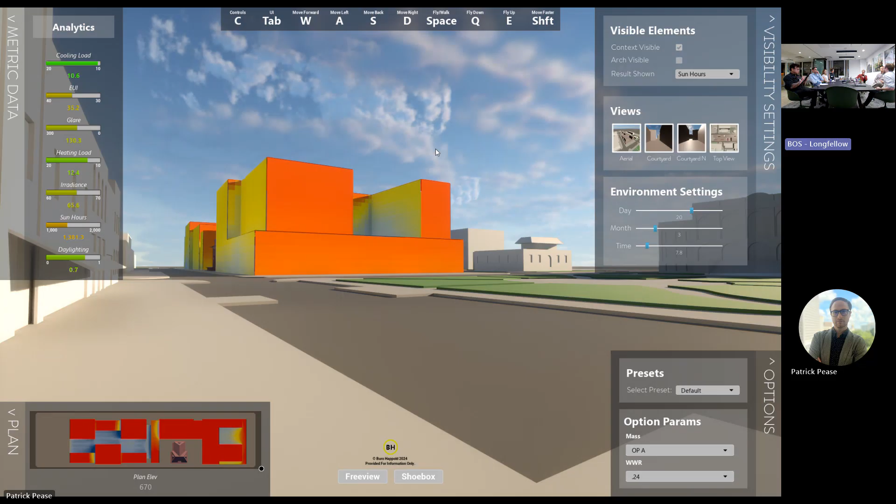Yeah, I think I know what you're talking about, kind of blocking the view from other things. I don't have it here as much, but in that other example with the people, etc., we have ways to turn off all the context. So you can take a step back and just say, okay, almost make it a sheet again, what's it actually look like? So we try to provide both.

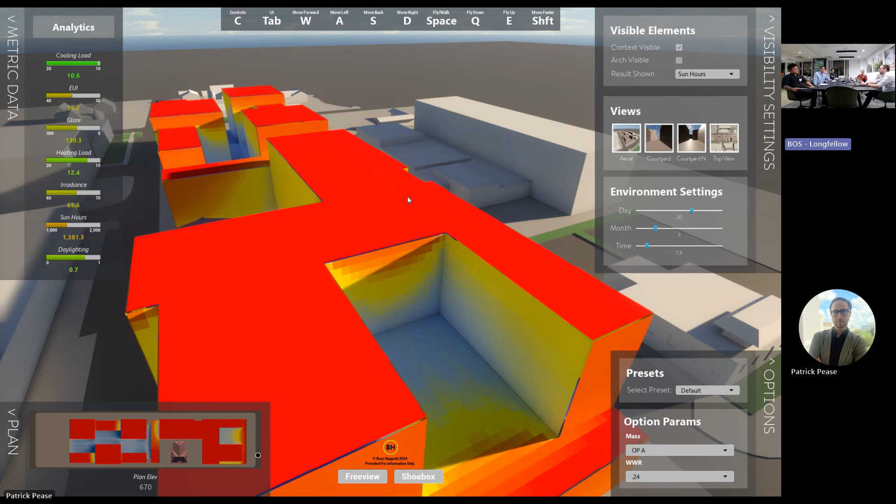Because you can get lost in the details too, especially a client can be like, I'm sure I've had this discussion of why is it so dark in that corner, is that important? And if that's the render you do, that becomes the discussion. But I think starting, at least on this one, what we always did was start it far out.

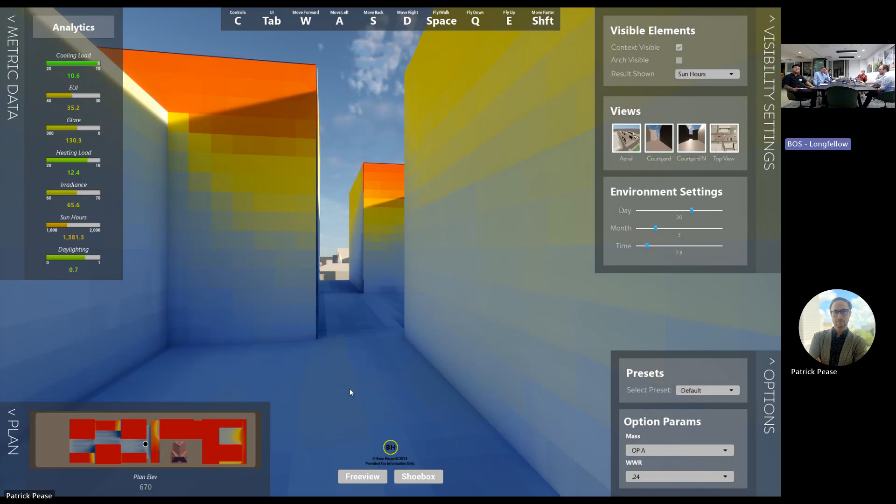And then you can see, in this case, because we looked at the courtyard so often, we had these saved views to say, okay, this is what your courtyard looks like. Dark, we don't want that. From the other direction, very dark. So we definitely learned over time. We didn't start with these saved views, we learned from the first thing what was important to them, what was important to us, which was an interesting challenge.

What's going on with the pink house? Is that the guy who didn't want to sell it to the developer? That's what I was going to ask.

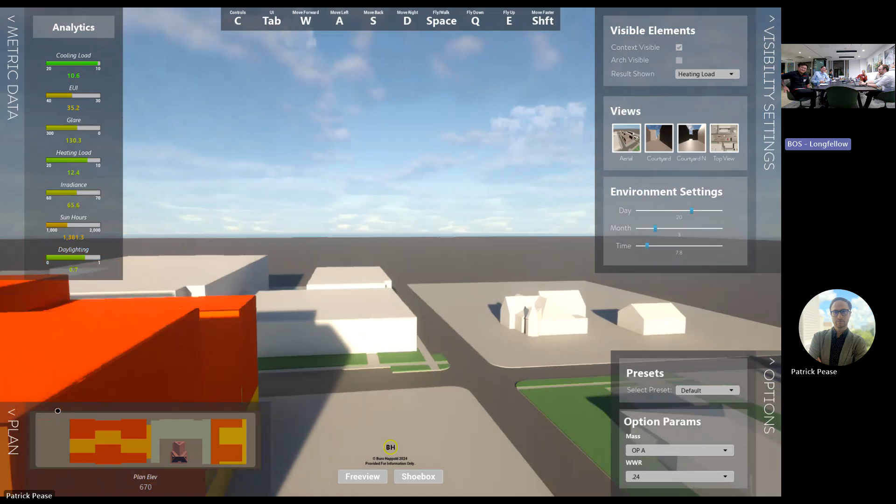So the pink house is the town jail. It is historic and it is going to get renovated into something, but for this project, it was just going to be left there and they would do something else. But we left the pink jail house, so it was there. Is it historical, not in use? It's not in use. I don't know, but I don't think we touched it in any of these. We just left it there.

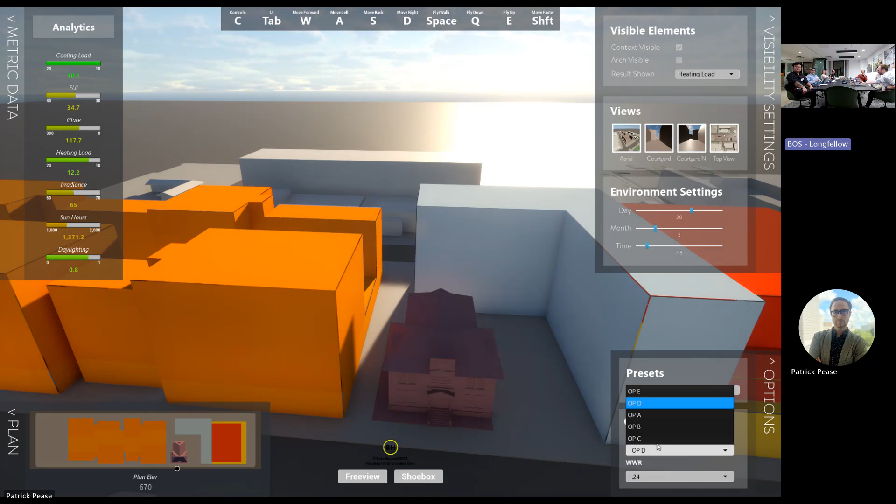Have you gotten feedback from clients after they implemented the recommendations about how it actually turned out? Particularly thinking about that gallery. Oh yeah, we have gotten really good feedback from clients that it really helped them understand what they were looking at. For this particular project, it really helped them understand those sun hours and the EUI.

Well, it's gone through many renditions, but it is much closer. Oh sorry, I forgot - I don't have all the data loaded, so that option combination, there's no data for it. So the end result is much closer to this than when it started. So it really helped them morph things and move things. And they were, I think, appreciative that the analysis wasn't just static. It really let them think it through, which was really good.

On the gallery side, they also really appreciated some of those visuals, especially on the glare. The glare was really important to them. There's actually an architectural gallery, and what they do in there is pinup sessions, where they have drawings pinned up, and no one could see the drawings because there was so much glare on the boards. That was very important. This was actually a project we just finished in June, so they haven't done construction, haven't installed those fins yet, but looking forward to see how it looks after those are installed. Because even with those, yes, some of it's still going to have some glare, and it lets them know our pinup boards are here. So it's not perfect, but it's a vast improvement.

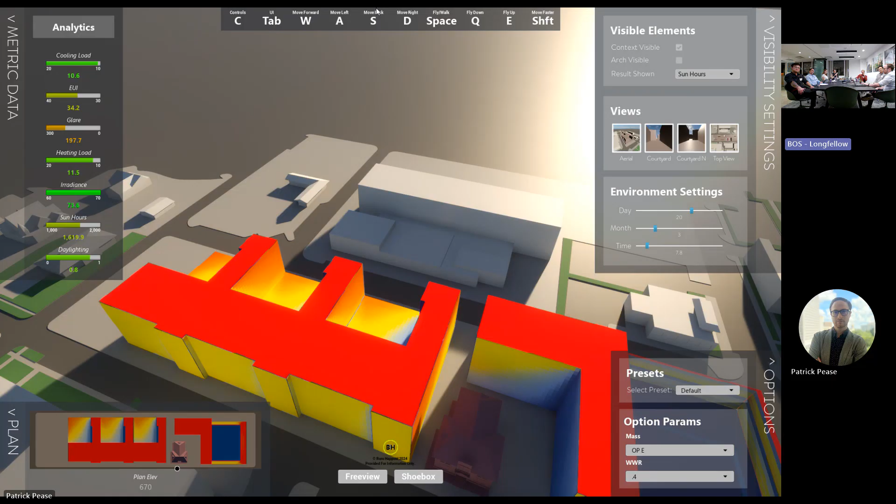Okay, I guess if there's no more questions, I'll stop the recording so we get something loaded, and then I don't think we necessarily need to - certainly we could go across the street, but we could stay here and just chat about the chapter, things like that. Thank you very much, yeah thanks.

Figure out how to turn off my own system. A different system in every room.